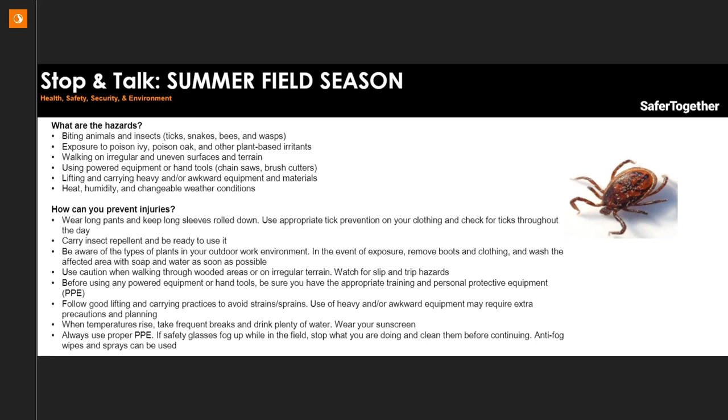Just a quick safety moment before we get started. Summer field season is upon us. As you go out to perform inspections or maybe some field investigations, take note of hazards such as biting animals and insects, poison ivy, and particularly, at least down here in the Southeast, the effects of heat and humidity. It's always best to try to avoid risks whenever we can. So, try to avoid going out at times when some of these hazards may be most prevalent. But if you can't avoid it altogether, then you take some mitigations, which are wearing proper apparel, insect repellent, drinking plenty of water, and taking breaks as needed.

In today's presentation, I'm going to focus on 3 items. First, I'll give you an overview of risk to define what it is and explain how it works alongside traditional standards-based assessments. Then I'll cover some of the benefits of adopting risk principles within your dam safety program and provide examples to help illustrate the benefits. I don't plan to go into too many technical details today, so hopefully this gives everybody just a broad understanding of what risk is and how you can leverage it to improve dam safety within your program. And obviously, if you have more technical questions, I'd be happy to follow up with you afterwards.

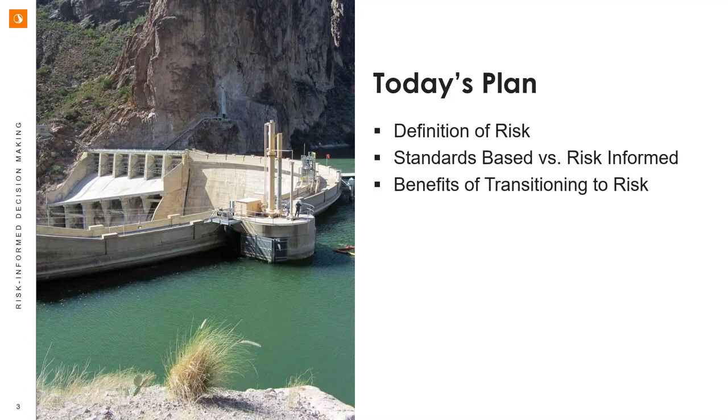Before we get going, I'm curious to know what your current understanding of risk is. So there's a poll that's going to drop into the chat there with a few answers. Please take a moment to respond, and then we'll revisit these answers at the end.

Many of you are probably familiar with a potential failure modes analysis, or a PFMA. Risk analyses are built from the hazard and potential failure mode identification that are developed during a PFMA. The risk analysis process is a systematic and methodical approach for estimating probability of failure and consequences due to potential failure modes. So risk is therefore a function of the likelihood that the hazard occurs, the probability of failure, and the consequences if it would occur. In this case, hazards are things like the normal reservoir level, which is actually considered a hazard as part of a risk analysis. An earthquake is a hazard, or a flood.

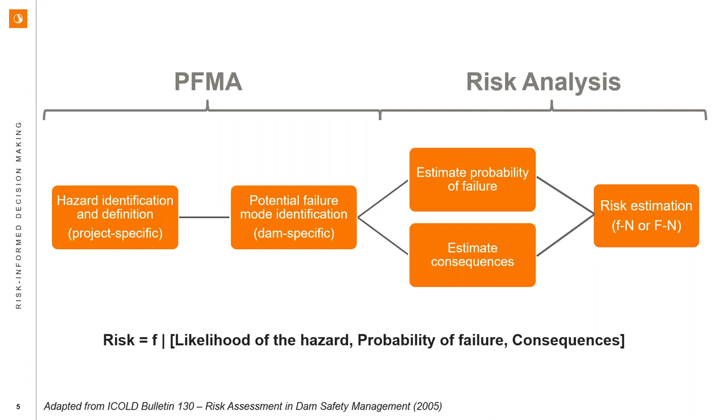There's generally 3 accepted levels of risk analysis. And the level that's appropriate for you to use is guided by the purpose for performing that analysis. So do you want to take an interim step that's just going to help you rank risks, or will you be making decisions based on the outcome? And obviously with these 3 levels, there's different amounts and details of input studies required based on the level that you select.

So qualitative risk analyses use simplified tools and descriptive scales, and they're really appropriate for screening level studies and getting a relative ranking of risk, perhaps within a single dam or across a portfolio. Semi-quantitative risk analyses display the results on a matrix and give you an order of magnitude assessment of risk.

And finally, quantitative risk analyses are obviously the most detailed and most labor intensive. This is where you can calculate an annual probability of failure and consequences for all levels of loading conditions, and ultimately compare those against tolerable risk guidelines to understand where you fall relative to society's tolerability.

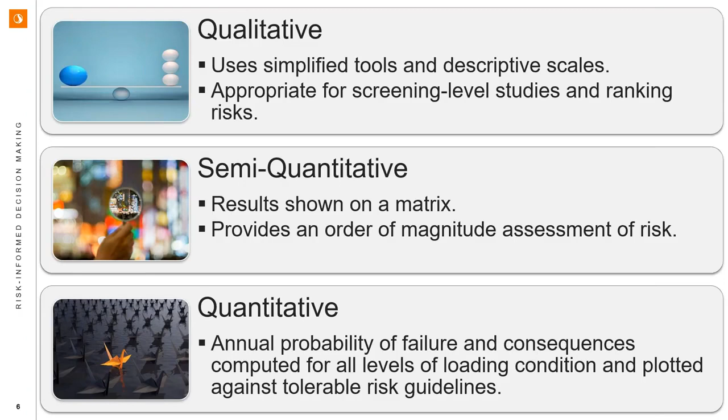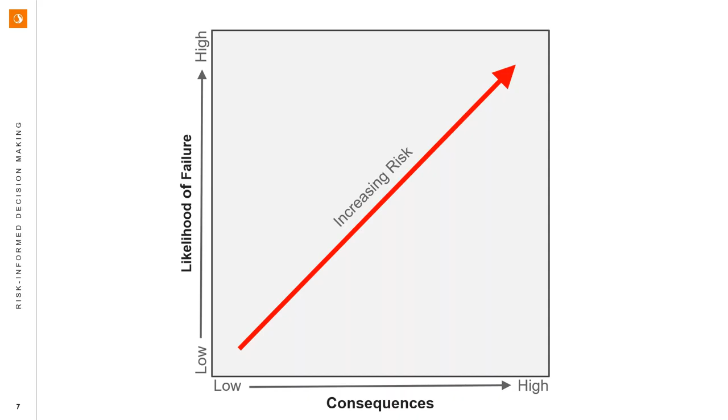Typically, we represent risk on a plot that shows likelihood of failure on the y-axis and consequences on the x-axis. Lowest risk is in the bottom left corner, and it moves towards highest risk in the top right corner. Potential failure modes are plotted on a chart like this, so it's easy to interpret what the risk drivers are. Risk drivers are those potential failure modes with the highest risk. When we consider risk-informed modifications, we can leverage both axes to try to reduce risk. And I'll explain a little bit more on the next slide.

The premise of risk-informed upgrades is to improve the risk profile for a dam. And by improve, I obviously mean reduce risk. Following a risk analysis, we have an estimate of the risk due to each potential failure mode, and we can develop options to reduce risk. So within that option identification step, you can think about structural and non-structural options.

Structural options are broadly classified as physical improvements to the dam. A downstream buttress could be added to address a stability issue. Spillway capacity could be increased to prevent overtopping during a flood. And structural improvements typically affect the likelihood of failure on the y-axis. So we're moving down the y-axis generally.

Non-structural options generally help when consequence reduction along the x-axis is possible. We obviously can't convince people to move out of an inundation zone, but we can increase the warning time they would have to get to safety through emergency action plan improvements or installation of early warning systems.

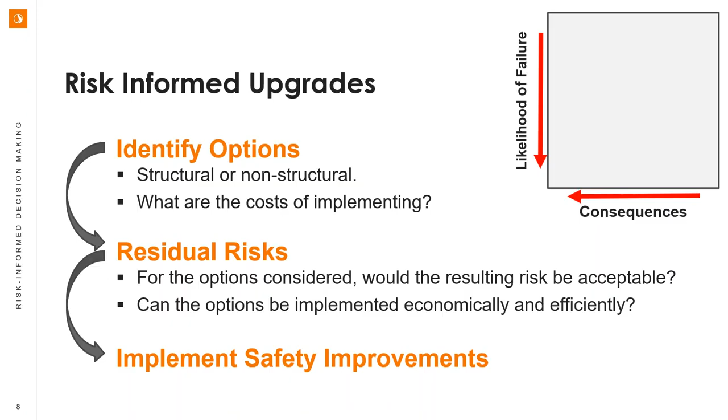Once options are identified, the remaining risk following implementation of the option can be estimated. This is what we term residual risk. This helps you understand if the improvement will achieve the risk reduction that's desired and is needed to evaluate the cost benefit for performing the work. Finally, the preferred approach is selected and implemented.

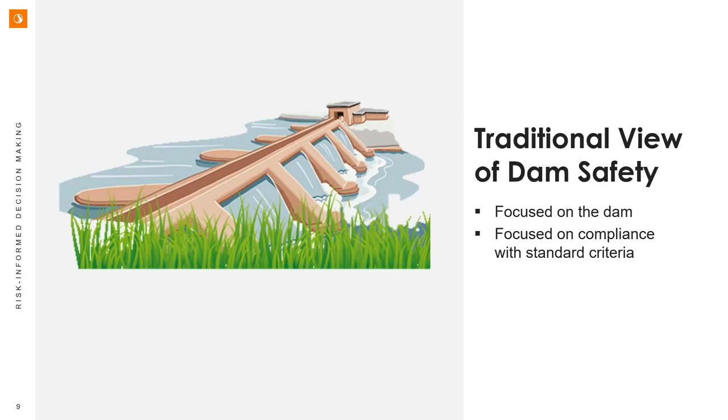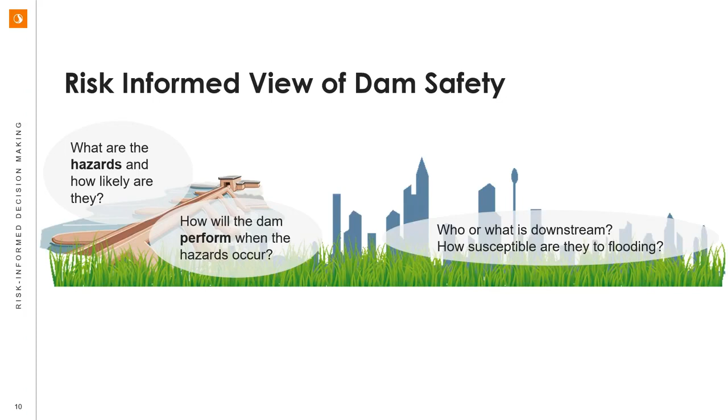In a risk-informed view of dam safety, we take a step back and we can see the whole picture, from the hazards to the performance of the dam and the potential harm to downstream life and property. So as we've talked about, risk is a function of the hazards, the performance of the dam, and then the potential consequences coming about from that. So it gives us that holistic understanding of how all parts of this can impact our risk profile.

When we shift to a risk-informed approach, that doesn't mean that we're abandoning standards. Instead, we're trying to couple the outcomes of traditional engineering assessments with a probabilistic approach to estimating how the dam will perform when it's exposed to different loadings. And we can be guided in these estimates by historical incidents.

And so we still reference our understanding of factors of safety. We also, though, take into account important case studies, incidents like Teton Dam that give us a strong understanding of how certain potential failure modes can initiate and progress, and ultimately what types of consequences can occur from those.

Ultimately, it's really critical to remember that understanding risk provides an additional data point for decision making. Decisions should not be explicitly based on risk, but you can consider dam safety risk as part of a holistic decision-making framework. So this involves a bit of a shift from a deterministic to a probabilistic thinking approach.

So I mentioned standards-based assessments and thinking in terms of factors of safety, for instance. That's a deterministic method. We have a prescribed way to do an analysis, and then we have an acceptance criteria for whether or not we meet the minimum qualifications.

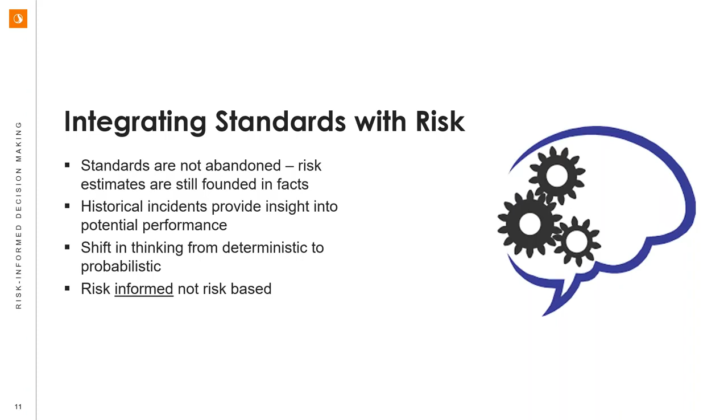Now that I've given you a little more background in risk, let's walk through some of the benefits that you could see as an owner by adopting risk principles for dam safety management. I've tried to group these into three main categories. The first one is an increased technical understanding of the dam or of a potential failure mode perhaps. The second one is improvements to portfolio management. And then the third one is business case support.

So what I'm going to go through next is by no means an inclusive list of the potential benefits you could see from adopting a risk-informed approach, but I wanted to highlight these because they're ones that we commonly see and commonly see owners being able to leverage.

So the first one under increased technical understanding is sometimes standards-based assessments just aren't quite enough. Certain potential failure modes can be difficult to define using factors of safety, and internal erosion is a great example of this. We have ways to assess, say, heave at the toe of the dam, which gives us an understanding of whether internal erosion along the foundation could maybe initiate. But factors of safety or standards-based approaches are fairly ill-suited towards describing that full process that would be required for internal erosion that initiates to then ultimately result in an uncontrolled release of the reservoir.

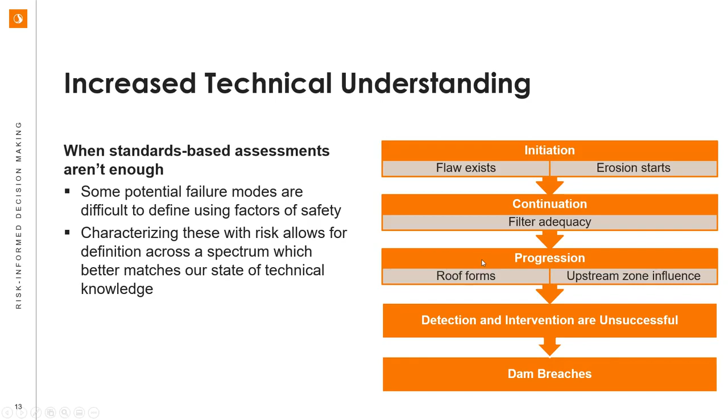The next one under increased technical understanding is the ability to prioritize additional studies. So when we do a typical dam safety review, oftentimes there's a data gap analysis that comes along with it. And that's generally driven by a list of certain studies or evaluations that should be completed for every dam. And so it could create a list of additional studies that now need to be performed or information obtained. Maybe there's not enough geotechnical information, or piezometer data needs to be beefed up. You end up with this long list of things to go do and find, and how do you identify where you should tackle it first?

So through the risk analysis process, we can try to narrow or prioritize that list. And the process is dynamic. So as we complete certain studies that maybe are associated with identified risk drivers, the results of those studies can then influence what we tackle next, or if the priority of that list needs to change. So it helps us better structure those studies, and it helps us have an understanding of timing and urgency with which to go collect that information.

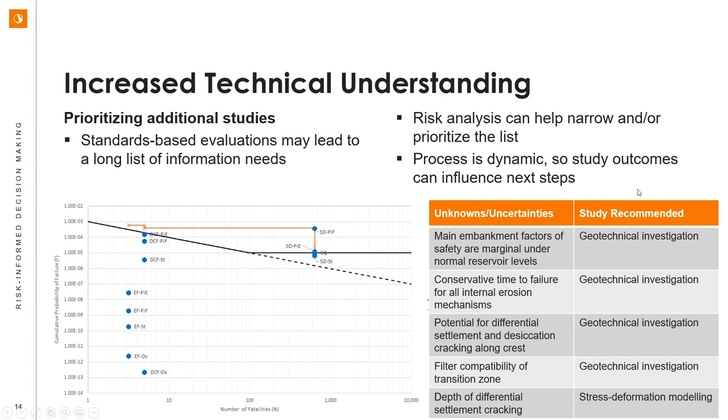The final item under increased technical understanding is to better be able to target surveillance and monitoring activities. When you've gone through a potential failure modes analysis process, you often have that question at the end about what surveillance and monitoring activities are associated with, say, category 1 or even category 2 PFMs.

The idea behind using risk to do this is very similar. So we'd like to be able to target enhanced surveillance and monitoring towards risk-driving failure modes and really supplement that general dam health surveillance and monitoring with these very targeted activities. And so an example that I think demonstrates this very well is, again, with internal erosion.

Piezometers, when they are installed in dams, are a great way to understand the overall phreatic surface profile within the dam. But if you're trying to find a potential internal erosion pipe using a piezometer, it's a bit like finding a needle in a haystack. You could poke hundreds or even thousands of holes and still not quite hit that spot exactly right to get the type of information you're looking for.

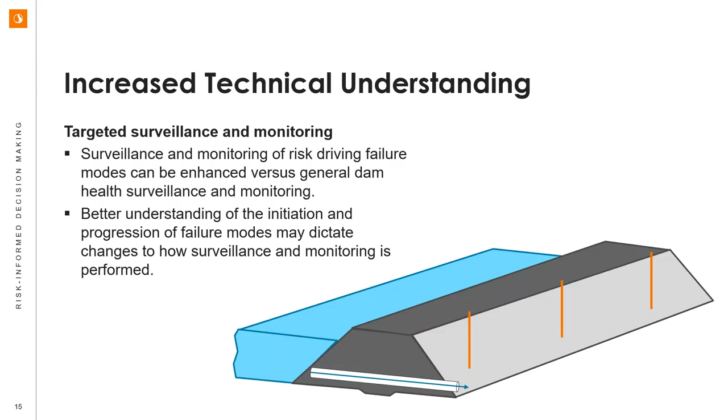Moving on now to improvements to portfolio management. This is really all about resource prioritization. And I think we can probably all agree that personnel and financial constraints are a bit at odds with the needs of our aging infrastructure. But by incorporating risk, that can help you determine how to best allocate resources for a single dam or across a portfolio of dams. And there's a couple good examples for this. So the first one, looking at how we can tackle risk associated with a single dam.

So in the example I previously gave about the Australian dam, this is what the final plot looked like after we went through those additional studies. But we still had a little bit of a high risk profile associated with certain potential failure modes. And these are our risk drivers. And so as we were thinking about what would you do first, basically, how can you get the most bang for your buck by making improvements to the dam or to the surveillance and monitoring program, we wanted to tackle those things that were at the top of the risk list. So that's an example of a single dam.

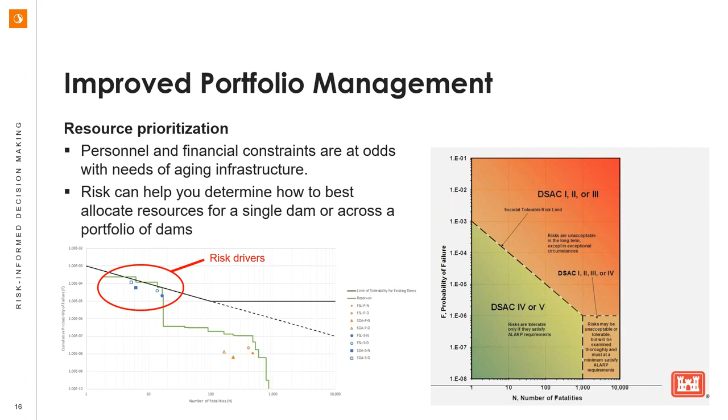A great example of a portfolio of dams is what the Corps of Engineers did with their screening portfolio risk assessment. So that process was completed a few years ago, and through undertaking that screening level risk assessment for all the dams in their portfolio, they were able to understand relative risk and assign an initial classification, in this case, DSAC 1 through 5. And now they're able to work to address the highest risk ones first. So those that are DSAC 1 through 3 and occur in this upper part of the matrix, that's where they're targeting their activities, because it's a way to have the greatest initial improvements in reducing risk for the overall portfolio.

So moving on now to business case support. I think the obvious one for when we talk about business case is having a better understanding of costs and benefits. And dam safety improvements, once we go through the risk analysis process and outline what can be done, those can be defined in terms of benefits to society or reduction in economic or environmental damages. So when I say benefits to society in this context, it means reduction in potential lives lost.

And ultimately, this cost benefit number is a data point that can help decision makers make better decisions. But as we'll talk about on the next slide, it's not the only thing that matters. It's just a data point that fits within your overall decision-making framework.

So an example to help demonstrate this, again, back to that Australian project, I showed you the final cumulative risk plot where we still had risk plotting above the limit of tolerability. So we had to do something. And working in a workshop setting with the client and other stakeholders, we identified a number of alternatives that could be done to address not only the risk driving failure modes, but all the failure modes that had been identified.

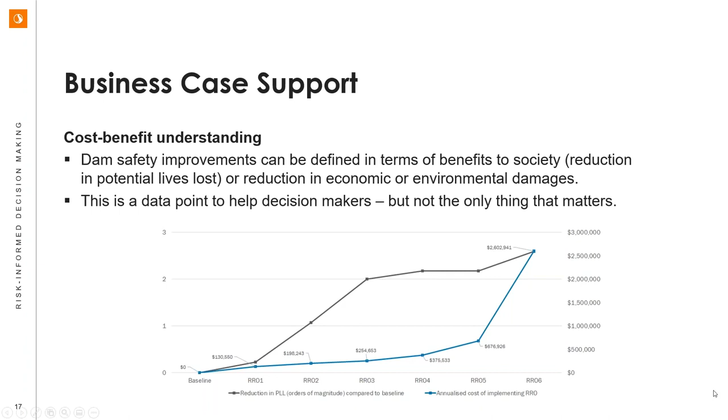So the last item under business case support is that it's important to remember that dam safety risk is part of asset management. And for utilities, whether they're energy utilities or water utilities, it can sometimes be difficult to equate dam safety risk with, say, loss of generation or loss of water supply. The cost of those outages are, I'm sure, a very well-known number in your organization. And it's pretty typical to do what's needed to try to avoid unplanned outages as much as possible.

Well, when we think about it from that perspective, a dam failure or even a dam safety incident, Oroville's a great example of that, where it wasn't a failure, but it was a very significant incident that affected their ability to operate that project as intended. That's an unplanned outage that is going to take you considerably more time and cost to recover from.

And so the challenge we face as dam safety practitioners is trying to put the dam safety risk into a similar context as other asset management concerns. So, say, the routine maintenance you need to do to keep a generator operational. Things where we have known time to failure parameters, and try to frame dam safety in that same regard. When we are able to make those links, and it's not perfect, it'll always be a little bit apples to oranges, it really does help when trying to communicate investment decisions to the decision makers.

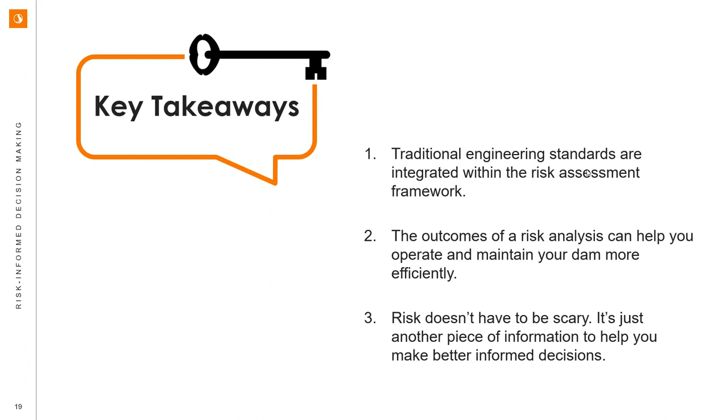All right, great. Thanks, Rachel, much appreciated. We do have a few questions that are coming in here. First one is probably one you may hear often. I'll just summarize it, but what are the schedule and cost implications of a risk-informed process versus a more traditional process?

It really depends on the level of risk analysis that you're going to go after. So, fundamentally, I think everything that goes into a risk analysis process are things that, if you're proceeding within a well-structured dam safety program, you're going to ultimately do at some point. The difference may be instead of doing a PFMA, you're now doing a risk analysis workshop, which is a little bit more effort, takes a little bit more time, but you're able to structure those activities and have a workflow that allows you to get the most important answers first and prioritize actions associated with those most important answers. But yeah, cost and schedule are variable based on exactly what you're trying to achieve from that process.